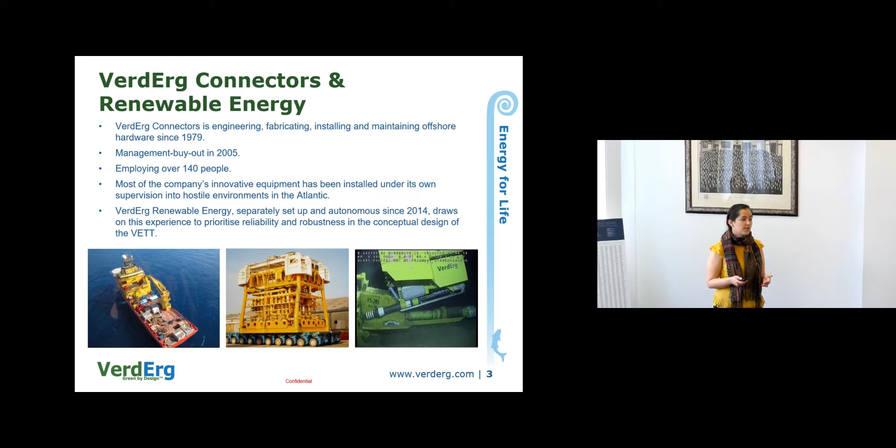So the company, when it was set up, it had a management buyout in 2005, to focus on deep water diverless connections for the oil and gas industry. And it grew from 30 people to about 140, and then in 2014, the subsea hardware side of the business was sold, so that the company could focus as VerdErg Renewable Energy exclusively on hydropower and on developing VETT.

So what is VETT? Well, VETT essentially is a low-head hydropower device, and it generates power from fluvial flows with a 1 to 3 meter head drop.

It takes this fluvial flow and it amplifies the pressure that the turbine would see. Conventional technology, in order to generate power from these fluvial flows, has to use large machinery, which can be expensive and quite a task to install. However, because of this pressure amplification, we're able to use a smaller high-speed turbine, which has a much smaller civil footprint and environmental impact. Where other technologies may prioritize efficiency, we also prioritize the cost of energy. So that's what makes us different.

How does it work? It uses the amplification of pressure that a turbine would see. So 20% of the flow is passed through the turbine, and the remaining 80% of the flow goes through a constriction. So the turbine sees an amplified pressure from the intake to where it is discharged into the constriction, into the Venturi. So in a typical site with a 2 meter driving head, instead of seeing 2 meters, it now sees 6 meters, and that is just using a fifth of the volumetric flow.

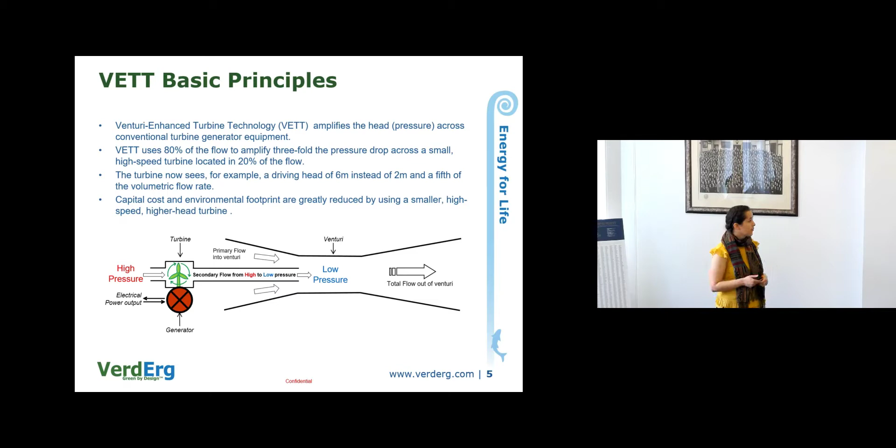Because of this, you can use a smaller turbine, and that is fantastic because it's obviously cheaper and much easier to install.

So where did the idea come from? Two people, really. Firstly, Daniel Bernoulli in 1738, with his Venturi principle, which is when kinetic energy in fluid increases, so when the velocity increases, the pressure simultaneously decreases. The other person was Mr. Peter Roberts, who is the managing director of VerdErg Renewable Energy, but also the inventor of the technology. He came across the application of Venturis when designing eductors to pump ballast water from flooded compartments.

So for those of you who are not familiar with eductors, or indeed 18th century hydrodynamic principles, eductors basically pump a high jet of water through a nozzle, and behind that nozzle you have an area of low pressure causing suction. A suction hose is connected to that, and that entrains another flow. VETT basically acts in the same way. It takes the 80% of the flow and passes it through a constriction, and then the secondary turbine flow is sucked into the Venturi. These two flows are then mixed, and then they diffuse further downstream.

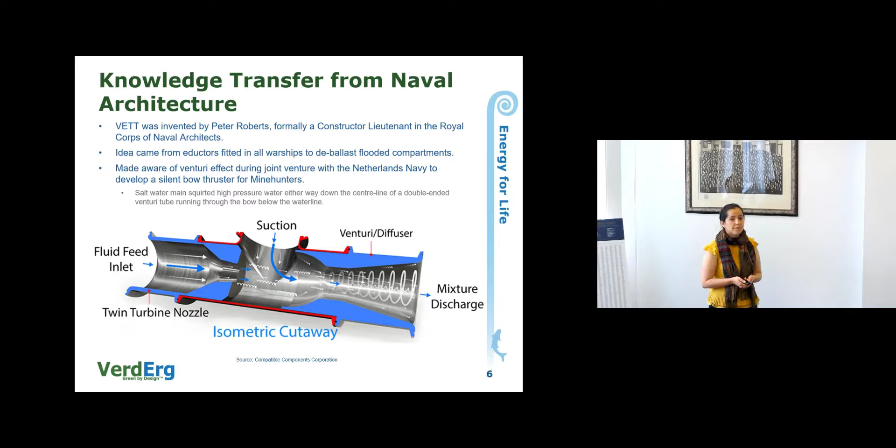So currently we are very busy developing VETT for river applications. We're doing our commercial demonstrator at the moment and have various others in the pipeline. But we also have done some work taking VETT for tidal applications, which I'll cover a bit later. We've also got our eyes set on wave energy, but a little at a time - I realise you can't do all this innovation all at the same time. So we'll get there.

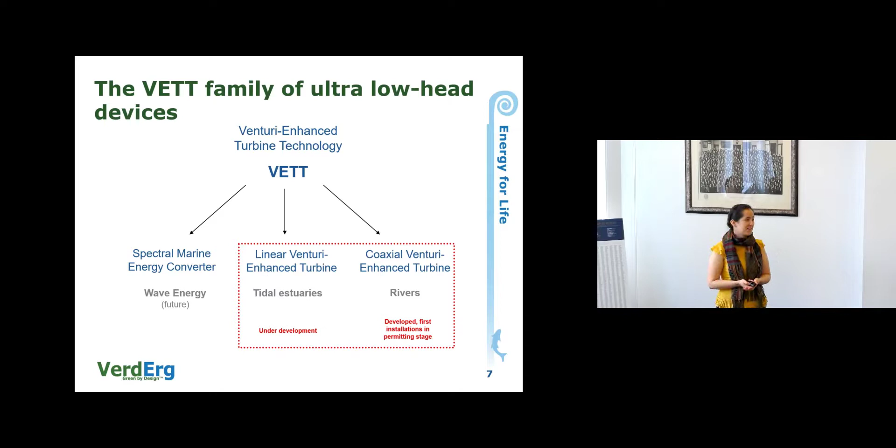So to get where we are, we have done so many numerical models, computational models, laboratory and field tests, and that's generated 6 patents and counting. Key milestones from all of this include the first principles of VETT being audited by Atkins in 2009, and then our successful live fish trials, which we did in 2013 and 2016. Also generating first power in 2014, but most recently we had approval from the Environment Agency to install for run-of-river hydropower.

Looking back to our prototypes and field testing, we took our VETT technology and installed a full-scale, fully instrumented test rig at the BHR Group Test Facility in Cranfield, based on the Cranfield University campus. This test rig was testing head drops of up to 3 meters. The tank simulates downstream, and the VETT is made out of perspex in the middle.

Here we wanted to just analyze the hydrodynamic performance of VETT, and we wanted to see if we could recreate that in the field.

So we took the whole test rig and installed it in a river up in Cumbria on a spillway. Here you see the spillway as it was, and then we have a schematic of the test rig as we had intended. There is a header tank to take the water in upstream, pass it through the VETT, and discharge it into a sink tank downstream. On the right you will see an image of what the test rig looked like.

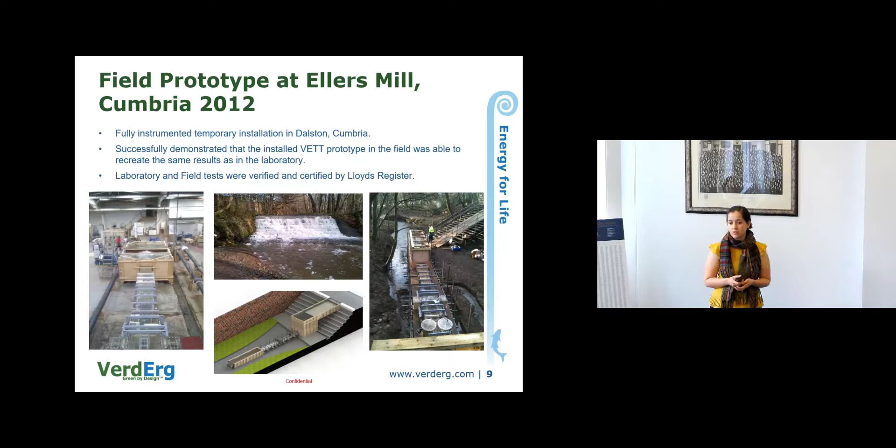But testing VETT and evaluating its performance hasn't all been test rigs and toys. We've also done lots of computational fluid dynamic models. This time we worked with Arup's Advanced Technology and Research team. They created a model to assess the hydrodynamic nature within VETT and how we could find design improvements and performance enhancements. We had tried this before, but there just wasn't the software or computational power to really recreate and capture VETT accurately. This is the first time that we could do that.

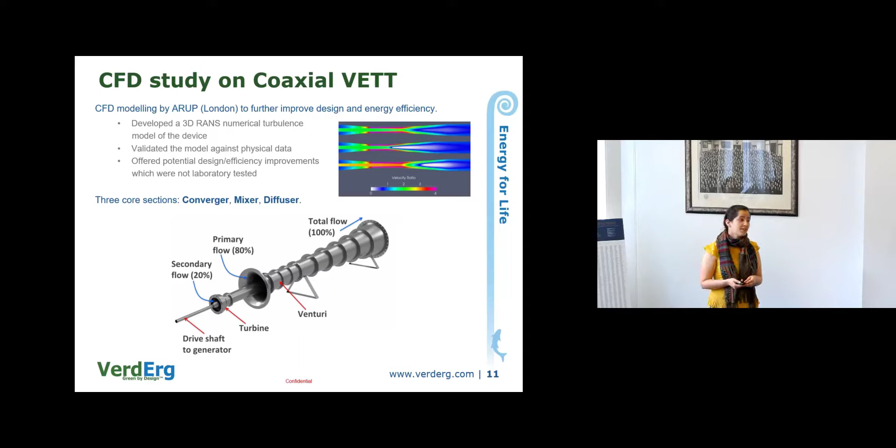What was great about this program was that we could take the data from the physical trials and validate this model. So there we were able to really recreate VETT, and then from there come up with new design iterations and performance enhancements without having to go back in the lab. Although lab testing is really great fun, it is quite costly, so this is a really good tool for us.

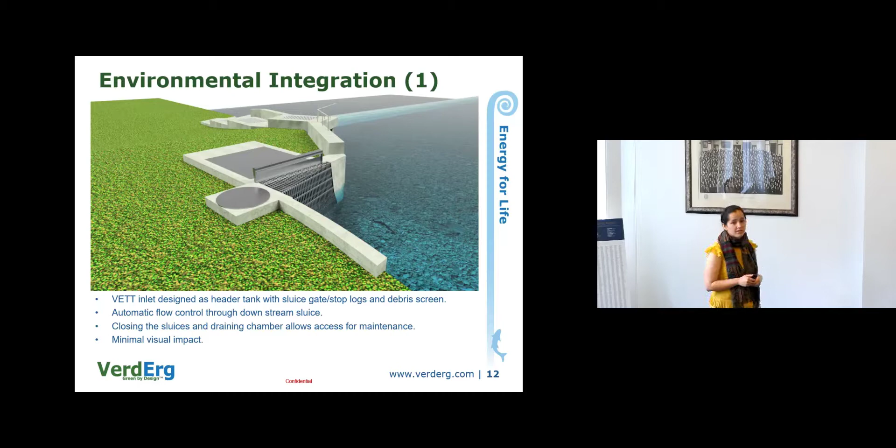Looking inside the tank, we have a sluice gate which you can use to shut off the whole system for maintenance. We also have the generator, which could be submerged or dry enclosed, and the fish screen goes just across the turbine. This screen also helps direct 80% of the flow to go through the VETT, and that VETT connects to a downstream pipe which discharges the flow downstream of the weir.

What's important to note here is that the fish screen only covers the turbine, which reduces the extent of maintenance, because existing hydropower devices normally have to screen the whole of the intake. So that's a massive cost saving there.

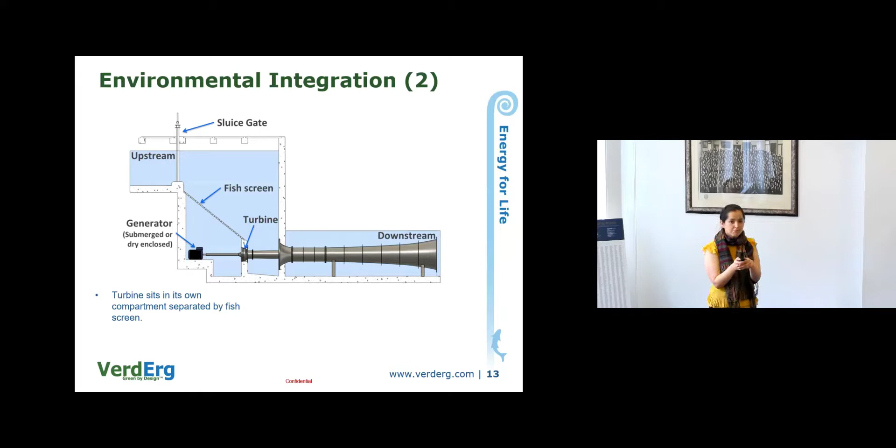So sites that we're looking at, in addition to weirs, we're also looking at lock structures and spillways, anywhere there's really a 1 to 3 metre head drop. We're looking potentially at generating between 30 and 100 kilowatts. Although not very much, every little bit helps, especially given the energy targets and renewable energy targets that we have set for the UK.

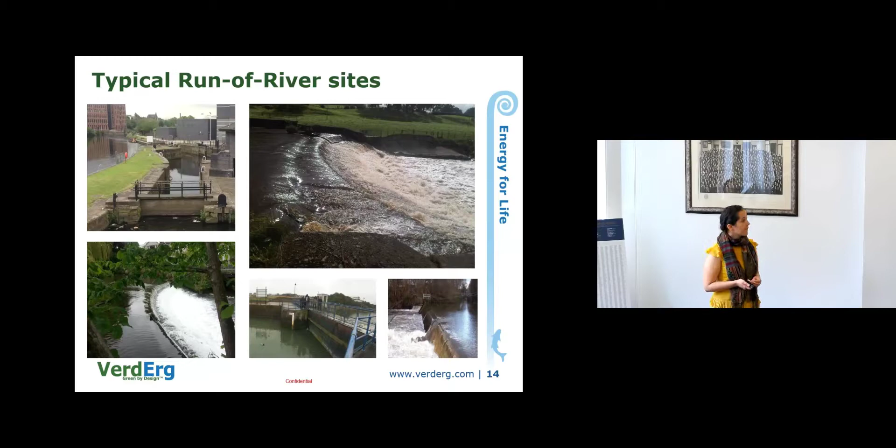So that's the environment, the engineering side, and the hydrodynamics and performance validated. What about the environmental design criteria?

For a renewable energy device to be truly green, we've got to think about what ecosystem it goes in and the species that reside there. So for hydropower, that's basically fish, and fish is the key part of that, in addition to the invertebrates and aquatic fauna, but fish are directly impacted by the turbines.

So we wanted to assess fish survivability in the second phase of testing and look at 4 particular impacts. One was the impact of the higher pressure ratio that occurs in the VETT. There's a massive pressure flux, and fish have swim bladders which are sometimes susceptible to pressure fluxes, so we wanted to look at the impact of that.

We also wanted to look at the impact of different fish species, so we tested salmon, eel, lamprey and perch. As fish occur at different areas in the water column, we also wanted to look at the effect of depth acclimatization and also post-passage swim behaviour.

So this test rig was testing with head drops up to 3.5 metres and up to 500 litres per second. So how did the fish cope? How were they with that?

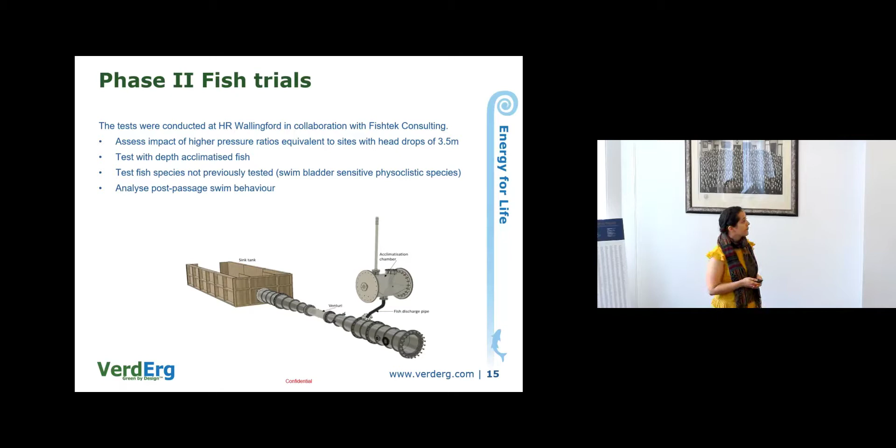This test rig was installed in HR Wallingford's Flood Modelling Hall, and thanks to their really amazing support staff and facilities, we were able to recreate a flow circulation system to simulate a river environment using the sump tanks that they have. So here is an image of what we did.

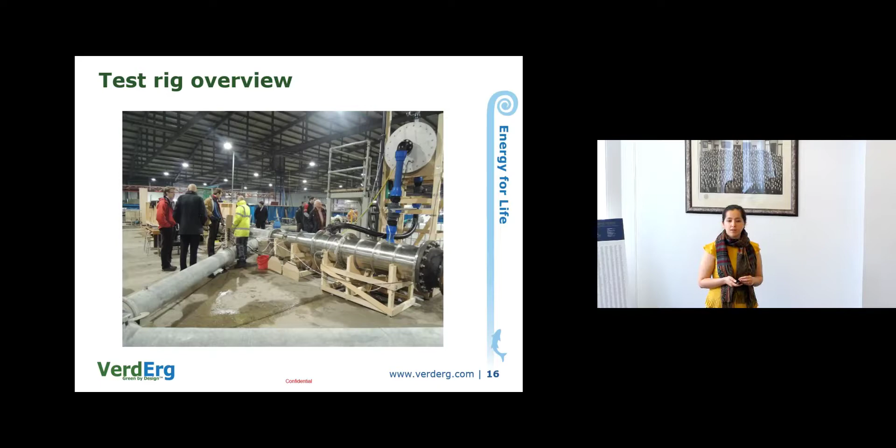So right across the front you can see the flow circulation pipe leading to the sump tank. Then you can see the Coaxial VETT stainless steel section. The acclimatization chamber, which is where we depth acclimatize the fish, is located up there in the top right. And then the sink tank, which is downstream, is located on the left. Also you can see lots of important people acting very importantly.

So looking a bit closer, here we've got the acclimatization tank, and we put fish in there for up to an hour to get them up to either surface or up to 3 metres depth acclimatization. We did that by using a pressure tube, and then they were released into the VETT using a ball valve.

And then on the right hand side you will see the image of where the fish came into, so the VETT and then the Venturi section is seen in perspex in the middle. Here we were getting flows of up to 12 metres per second in the Venturi, so they were subjected to, I call it a power shower, quite an extreme flow, but you'll see how it all went.

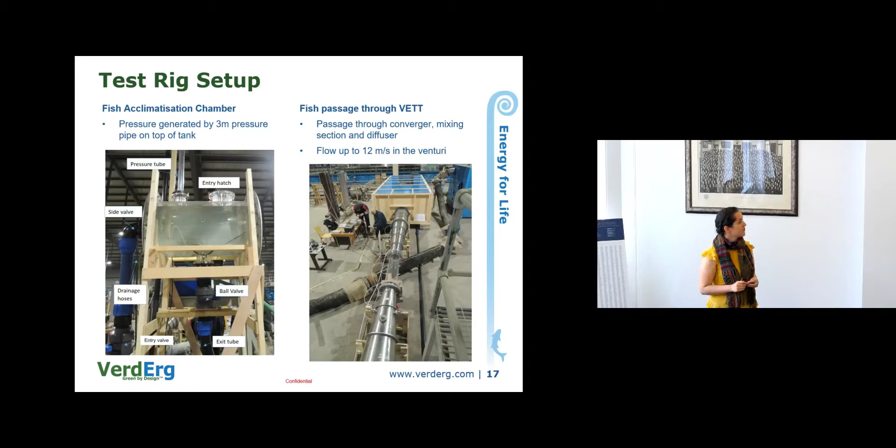We also set up the fish holding area around the back of the test hall, and fish husbandry and sourcing the test fish and doing the analysis of the fish was conducted by Fishtek, who are a consultancy who specialise in this. They were fantastic, and they really helped us understand the nature of the impact on fish and did all of our reporting.

As you can see, they're hanging over the edge looking at the post-passage swim behaviour of the fish. Not only within the tank immediately, but we also monitor them for 48 hours post-passage. You can see the eels swimming in the tube post-passage.

So we also did a long-term monitoring to see the impacts of any swim bladder and what repair took place. Fishtek also managed the dissections and assessed all the internal and external injuries.

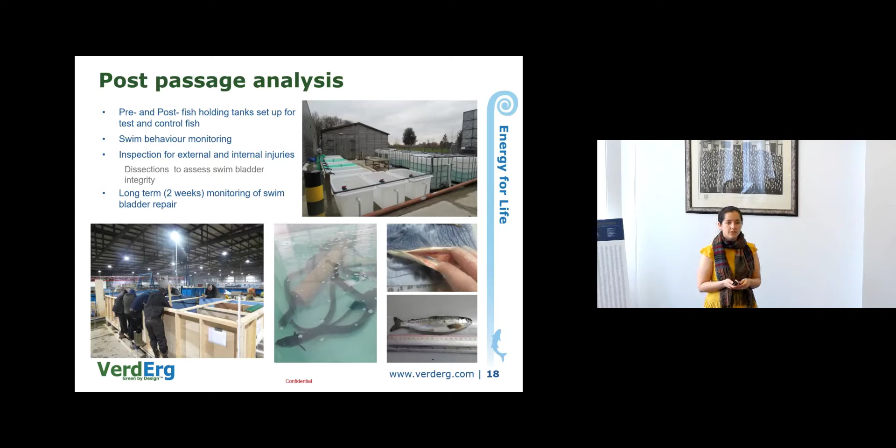Results - it all went fabulously, which we're really delighted about. There were no mortalities attributed to VETT, which was really positive, and that's especially poignant for eel and lamprey, who are protected species. And there was no impact to salmon either.

Now perch, who are more susceptible to barotrauma and the pressure fluxes occurring within the technology, were more vulnerable to the pressure changes. Although they didn't die, they had some swim bladder damage. But when we monitored them after two weeks, we found the vast majority had managed to repair their swim bladder.

So taking that post-passage long-term monitoring into account, for the proportion of fish that would go through the VETT in a river, it was calculated that their successful scheme passage rate would still be above 99%.

We presented all this research, the photos, reports, and statistical calculations to the Environment Agency, who are in charge of awarding licenses to hydropower schemes in rivers, and they have approved us to install for run-of-river projects. What's really important is they've approved us to install with screening of just the turbine. We were never going to put fish through the turbine, but we wanted to put them through the Venturi and the main flow. Now that has been successfully proven, we can offer the hydropower market a more cost-effective solution.

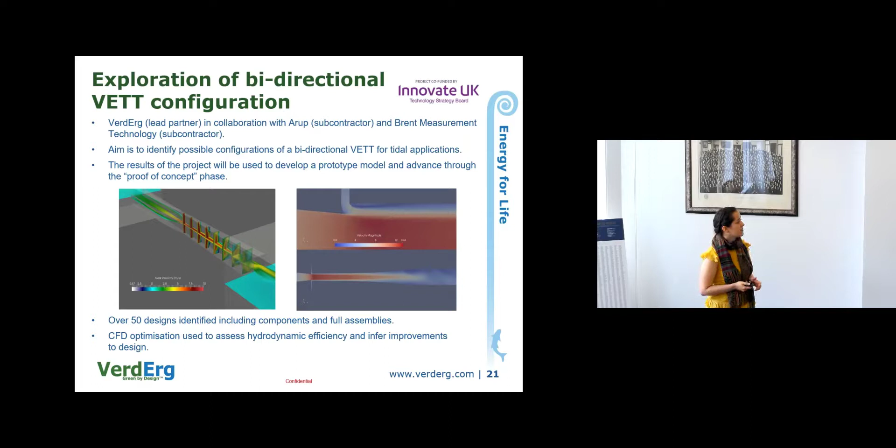The CFD models were used to assess not only their hydrodynamic efficiency and nature, but also how we could improve it and look into other aspects too. Here are some images from the full assemblies we're looking to take forward. In addition to all the schematics and models, we also have a lot of reports and data files which we use to infer more design changes.

What's interesting here is how we manipulated the primary flow - the majority 80% flow - and the 20% turbine flow, putting it laterally or on top of each other. It was quite fun and definitely a very innovative phase.

On top you can see these large flaps - these are inflatable weirs which can be used to hold back the water and generate the head difference required to generate the power.

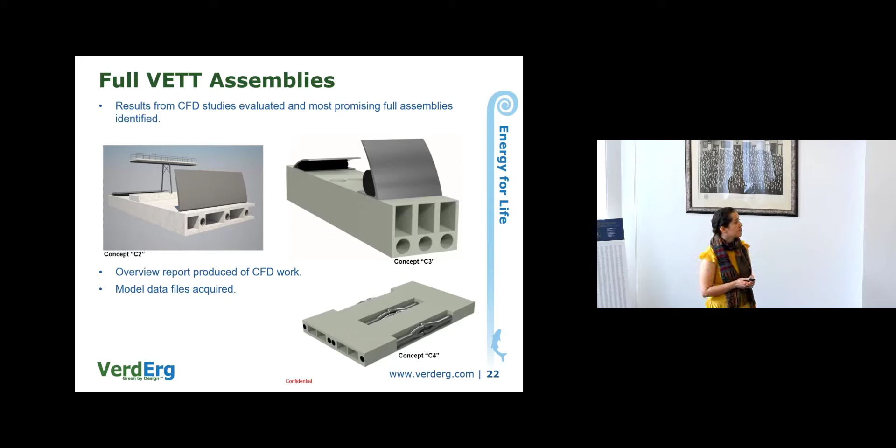Looking at one concept in particular, full assembly C2, here we've got the turbine flow and the primary flow in parallel. So the turbine flow is introduced from the side into the Venturi on the flood tide, and on the ebb tide we use baffles to redirect the flow, again coming in the opposite direction.

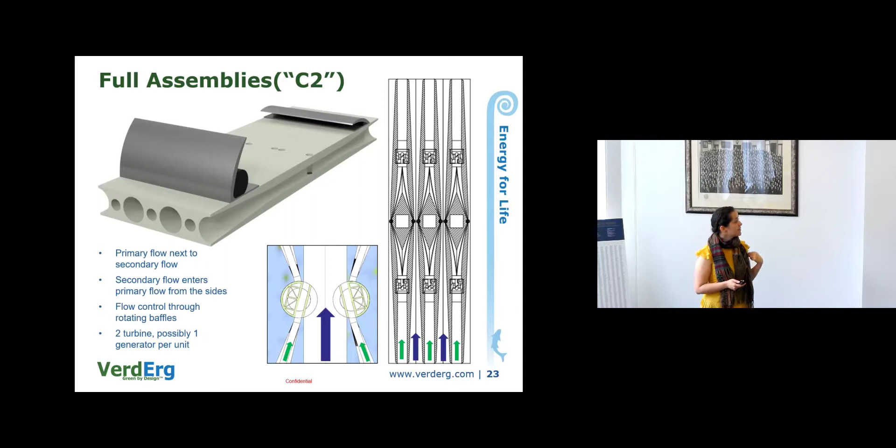What was interesting here is that although two turbines are needed, we looked into the prospect of just using one generator - so that's money saving. It was not only thinking about design, but also thinking about cost and buildability as well.

One thing we came away with was how to incorporate existing equipment and technologies. So here we've got an Aquadam, which is basically an inflatable gland - they come in lengths I thought were up to 60 meters, but I found out this morning they come in lengths of up to 100. They are very easy to install, much easier than conventional barrage technologies with hard infrastructure, which is quite intensive and expensive. Here you've got something you can install quickly and easily, but also deflate for navigational or flood alleviation purposes. That was really positive and something we're looking to adopt perhaps in the future.

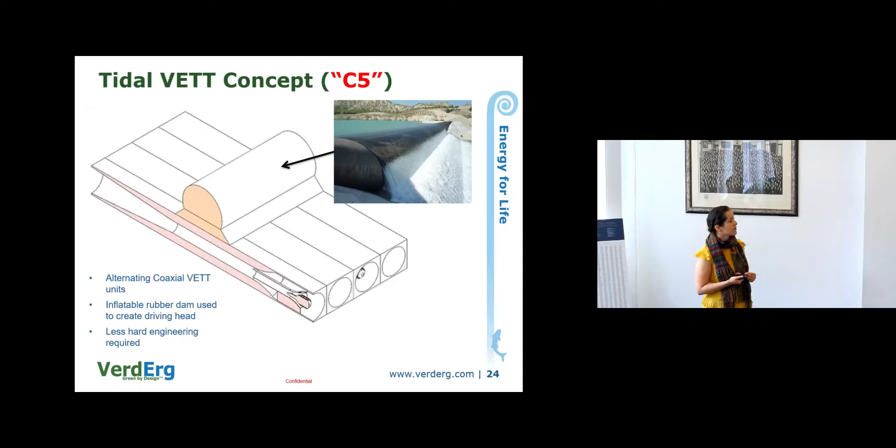So that's the design, but what about buildability? All these tidal schemes are going to cost money, so we wanted to see how we could produce the design but also build it in the most cost-effective way possible, incorporating existing installation techniques and construction methodologies. We looked at possible reef options and the lead time on all of this, but much more work is needed, so we're looking to address this in the future.

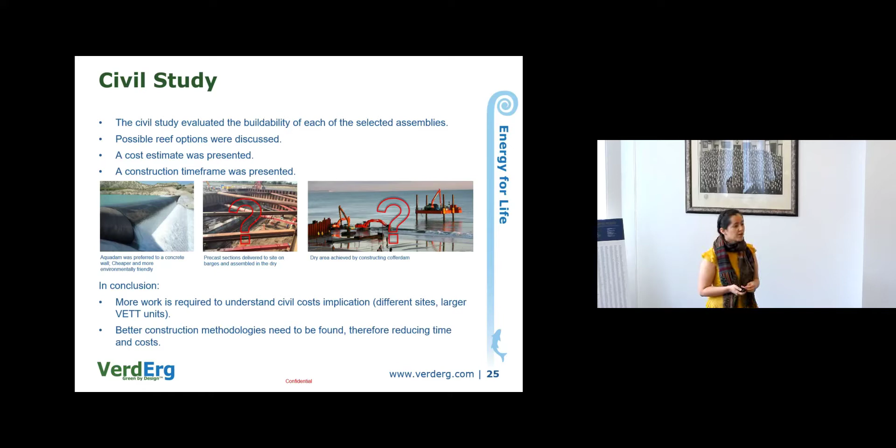Our next plan for our tidal scheme is obviously to do a prototype. We really love getting out there and putting the kit in the water. It's really great fun, and it's worthwhile seeing your drawings go from sketches on the computer to having equipment built, putting it in, and adding all the instrumentation, which is really good.

As you know, the UK has a fantastic tidal resource. We have apparently 50% of the tidal potential in Europe and the second highest tidal range in the whole wide world, which is really fantastic.

Because of VETT's environmental credentials and attractive cost of energy, we've been selected as a candidate technology for Wyre Tidal Energy, who are looking to develop a scheme across the Wyre Estuary. The same also for Solway Energy Gateway, who are developing a scheme across the Solway Firth.

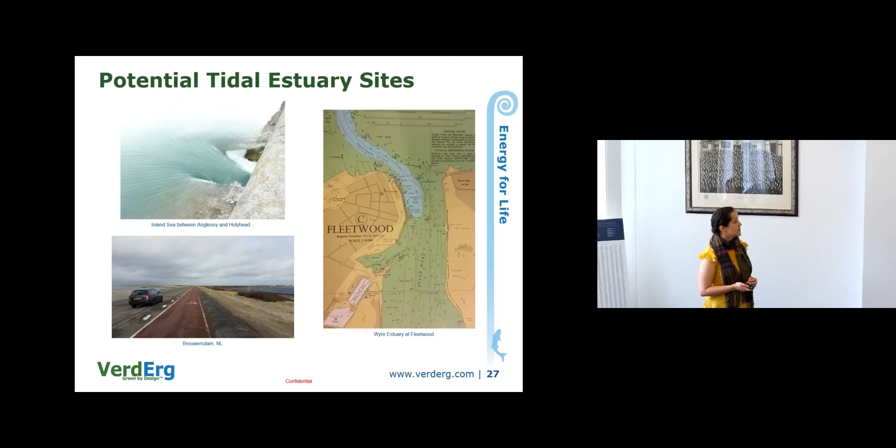But doing this is difficult. Tidal, as we've learned from other projects just on our doorstep - this is a picture, the top one is of the Solway crossing, which collapsed I think over 100 years ago because of ice floes. There are always problems and issues that we need to account for.

But the Hendry report, published at the end of last year, is encouraging the government to really get behind the tidal industry to exploit our tidal potential. So in light of that, here is an outline design of what we have planned for the Solway, with an installed capacity of 160 megawatts and an annual energy output of 245 gigawatt hours.

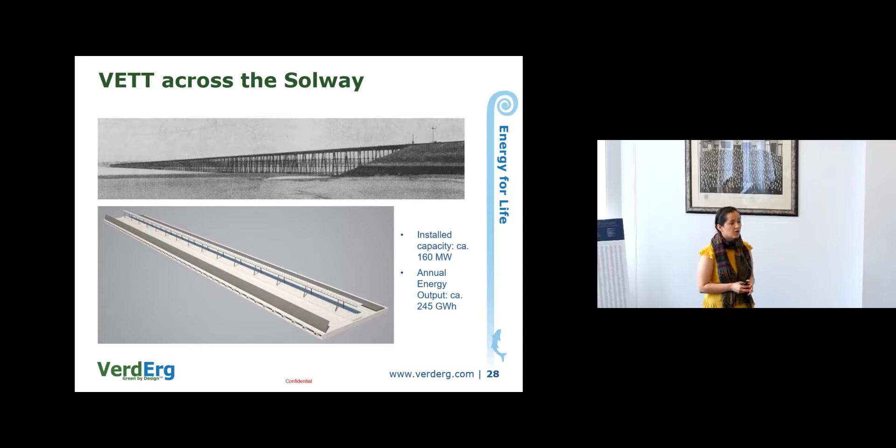Although other technologies may generate more power, we really prioritise the cost of energy. So we look to generate three-quarters of the power for half of the cost and a fraction of the environmental impact.

Just this week - I came back yesterday - I was at the Institute of Fisheries Management conference on hydropower and fisheries. And it's clear that, in spite of all the surveys, desk-based studies, site appraisals and models, there's still a lot to be done on understanding the impact of tidal power on the environment. One key issue is the impoundment of water and what impact that has on the hydrodynamic regime.

So in 2009, we were awarded funding by DECC, as they were previously known, to take part in the Severn embryonic technology scheme - basically, technologies that weren't quite ready at the time but could have the potential in the future to be a candidate solution.

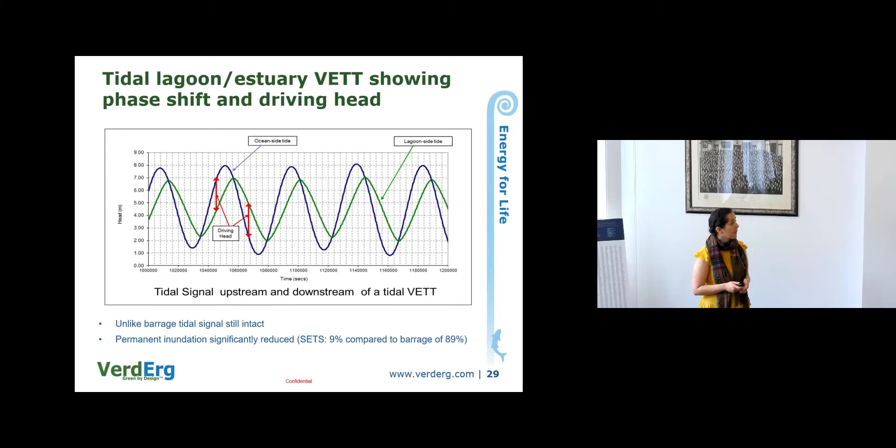There's still a lot of work to do, but we'll get there.

So here we have a hydropower technology that adopts knowledge transfer and lessons learned from naval architecture and engineering. It also encompasses aquatic and marine science, and we now have this technology which we hope to take to the global marketplace and really make a difference.

But building all of this stuff comes at a cost, and thankfully, due to the smaller turbines that VETT can use and the less civil infrastructure and screening of only the turbine flow, this cost is massively reduced. So we have a lower cost of energy driven by its lower cost of installation.

Here at IMarEST, I know they've been great and they're really helping the industry drive forward innovation so that we can have a positive future, positive energy future. And I really believe VETT can be a part of that. Thank you for listening.